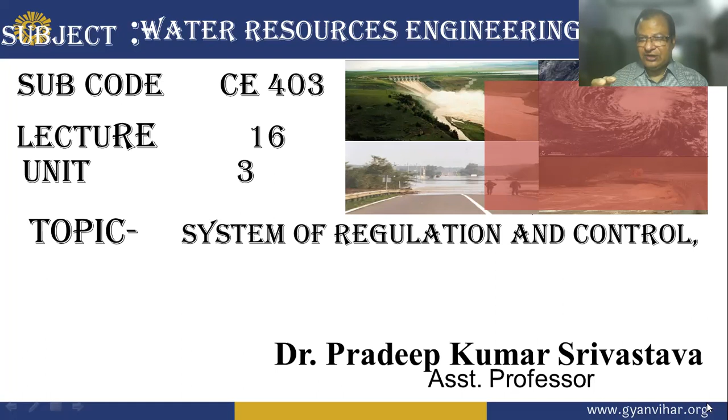Today's topic is the system of regulation and control. Dear boy, when you are constructing and maintaining a project, first you construct a dam, a barrage, or any structure. So how do you regulate them? Today's topic depends entirely on this matter: the system of regulation and control.

Now, in the project, hydroinformatic tools oriented to water volume, conservation, and control in open channel are going to be developed. They will be based on innovation by means of dynamic and non-linear algorithms.

The correct and optimal performance of the control structure in channel is an open problem after decades of research and development. A robust and efficient control methodology will be developed to form the base of control elements which allow a fast and trustworthy control of the characteristics of flow.

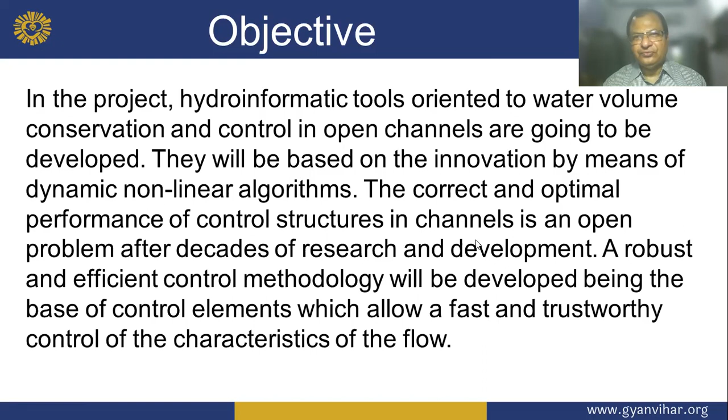Channel management is more and more based on the implementation of control elements that allow reducing the workforce necessary for regulation and increasing service quality, with the fundamental aim of developing a computational tool managed for objective-oriented control of gates.

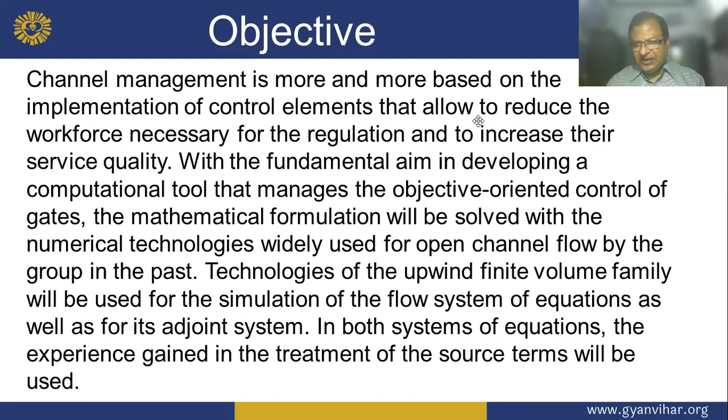The mathematical formulation will be solved with numerical technology widely used for open channel flow by the group, using upwind finite volume technology for the simulation of the flow system of equations as well as the adjoint system. In both systems of equations, the experience gained in the treatment of the source term will be used.

In case of a direct irrigation scheme, a weir or barrage is constructed across the river and water is headed up to the upstream side. This arrangement is known as headwork. Let me explain, think of it like this.

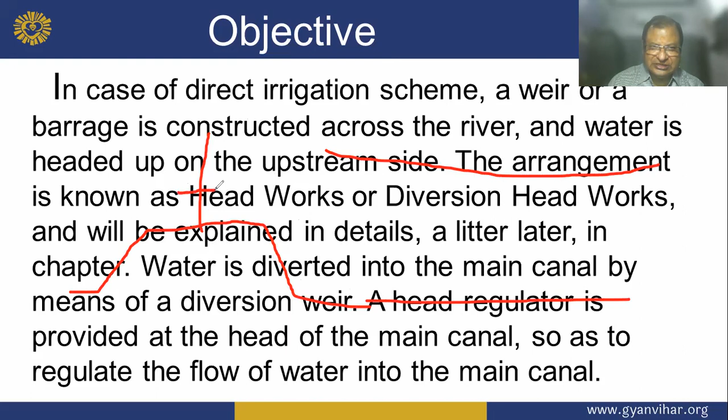Suppose, dear boy, this is the head regulator, it is the gate, and this is the canal. So if the gate is opened up to this point, the head of the canal will be this. If the gate is opened up to this point, the head is this. If the gate is opened up to a total of 4 meters, the head will be this. Clear? How does the head govern? Clear?

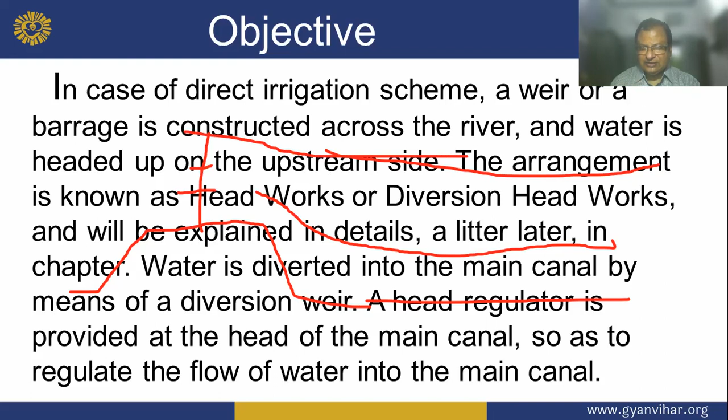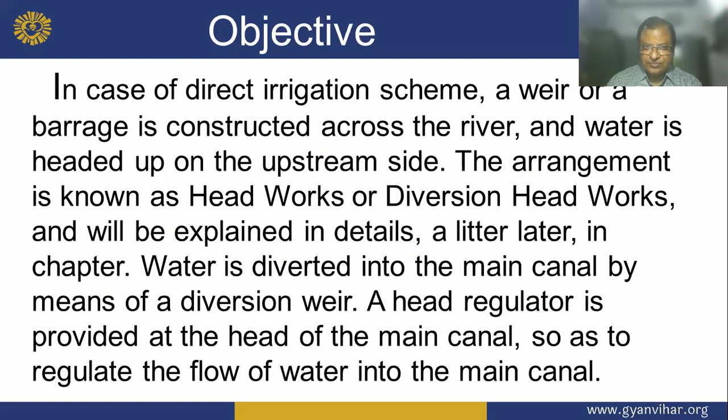In a storage irrigation scheme, a dam is constructed across the river, thus forming a reservoir on the upstream side. The water from this reservoir is taken into the main canal through the outlet sluice.

There are generally two main canals which offtake from the reservoir, called left bank and right bank. We will see in the diagram what is the offtake, and what is the right bank and left bank.

So dear boy, suppose this is the canal and this is the headwork. If a canal is passing like this, this side is the left bank canal, and this is the right bank canal. Clear? It is clear.

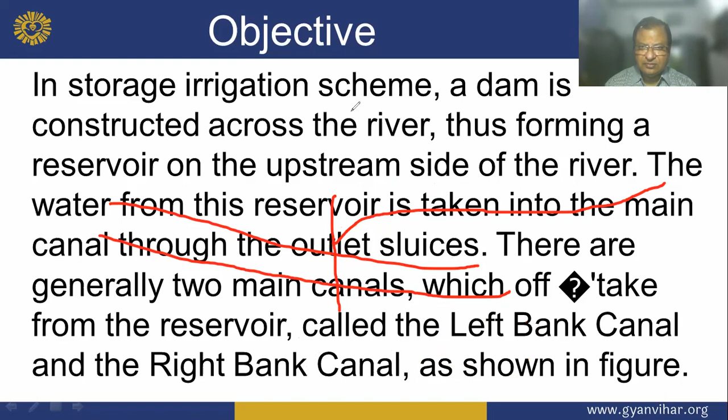In certain storage irrigation schemes, the commanded irrigation area may be far away from the dam site. In such a case, a separate headwork consisting of a pickup weir is constructed across the river on the downstream side of the main dam. Why, my dear boy? If your dam is constructed on the river here...

This is a very big hillock, a good site to store the water, and the irrigation command area is around 50-60 kilometers away. So after the 50-60 kilometers, you will construct a barrage, and this is the headwork of the barrage. Clear?

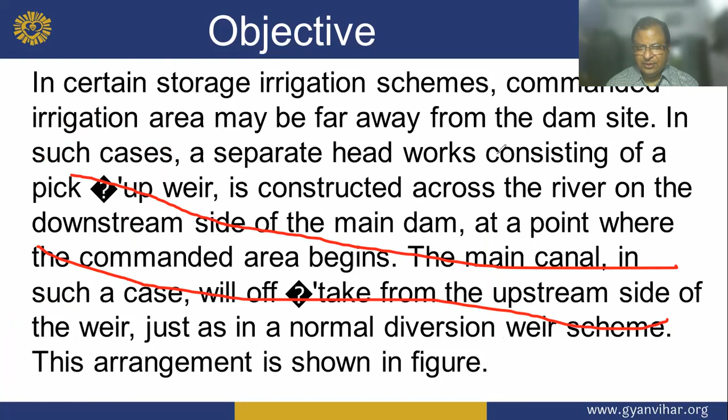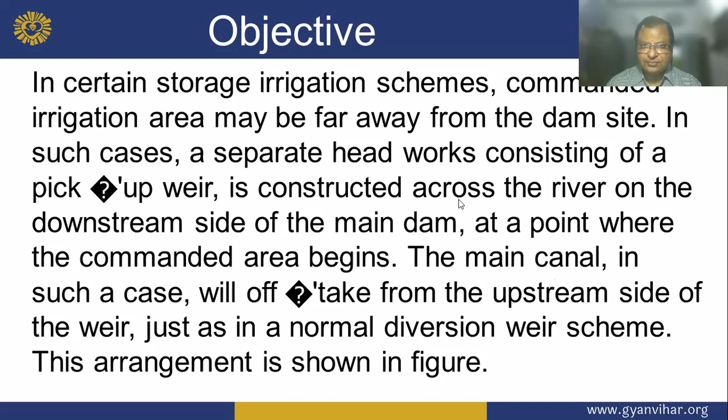The main canal, in such a case, will offtake on the upstream side of the weir, just as in a normal diversion weir scheme. This arrangement is called another offtake point. In both these irrigation schemes, once the water reaches the main canal, the problem left is to distribute this water into the field.

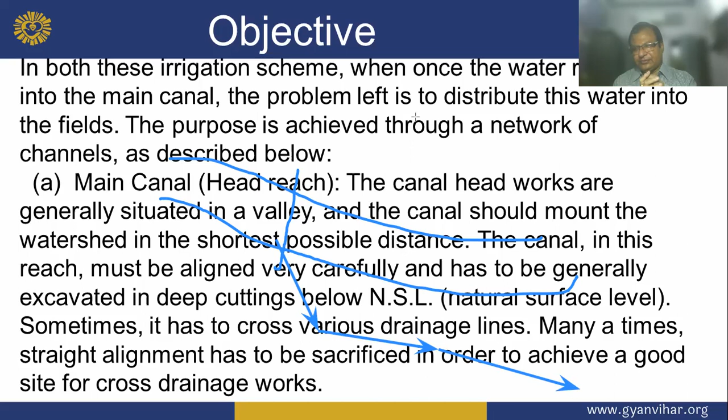If this is the river, if this is the barrage, and the main canal is rising here, now the problem starts: how will water be delivered? How do you supply the water? So it had to be distributed.

The purpose was achieved through a network of channels as described below. The main canal, at the head reach, the canal headworks are generally situated in a valley, and the canal should mount the watershed in the shortest possible distance. The canal in this reach must be aligned very carefully and has to be generally excavated in deep cutting below the natural surface level, which is called N.S.L..

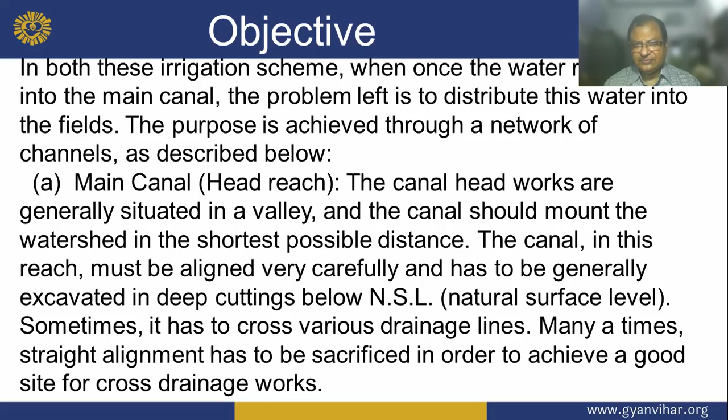Sometimes it has to cross various drainage lines, so many a time a straight line alignment has to be sacrificed in order to achieve a good site for cross drainage work. Now, distributaries: a smaller channel which takes off from the branch canal and distributes their supply through outlets into the minor or water course is called a distributary.

They are aligned either as a watershed channel or as a side slope channel. The discharge in a distributary is generally less than 30 cubic meters per second. Sometimes, depending on the country, this differs.

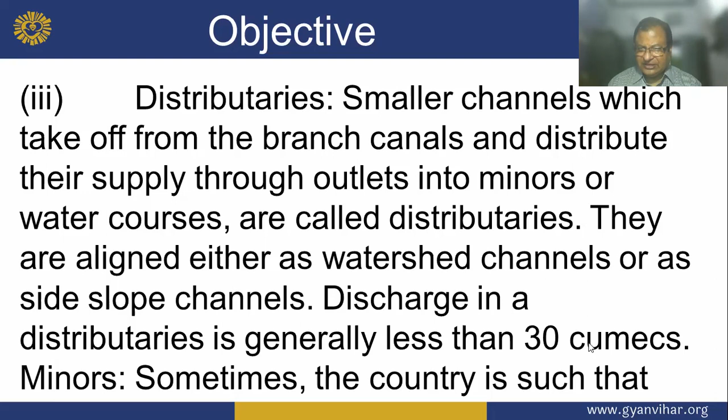For the main canal portion below the head reach, an attempt is made to align the canal along the watershed and somewhat central to the commanded area. Sometimes the watershed has to be sacrificed to bypass towns, and the main canal is not required to do any irrigation directly. Clear? Keep this in mind: the main canal is not required to do any irrigation.

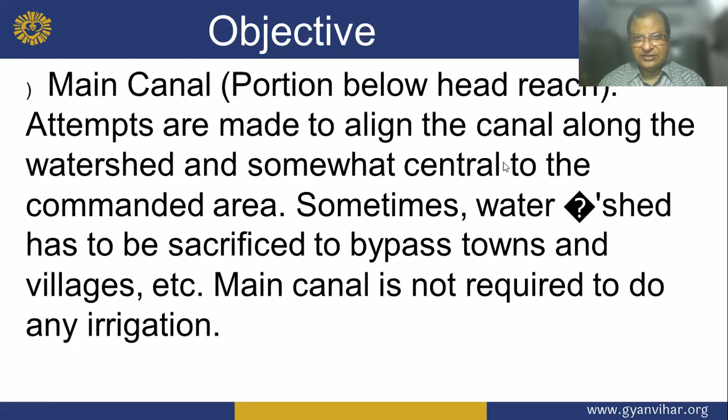Branch canal: when a main canal leaves the high ground, it must therefore bifurcate into branches, covering the whole tract required to be irrigated. The canal in such portions are called branch canals. So very little irrigation is done from the branch canal.

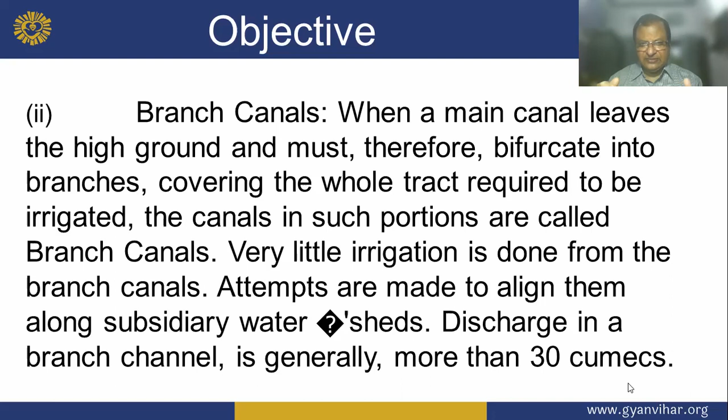Attempts are made to align them along a subsidiary watershed. The discharge in a branch canal is generally more than 30 cubic meters per second.

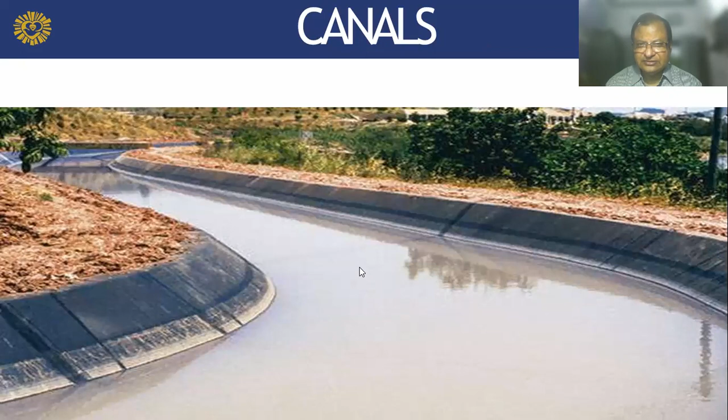Now, a canal is defined as an artificial channel constructed on the ground to carry water from a river, or another canal, or a reservoir, to the field. So what is the classification of canal?

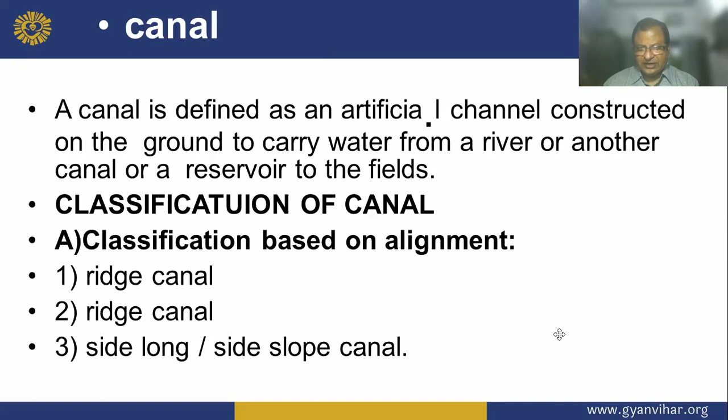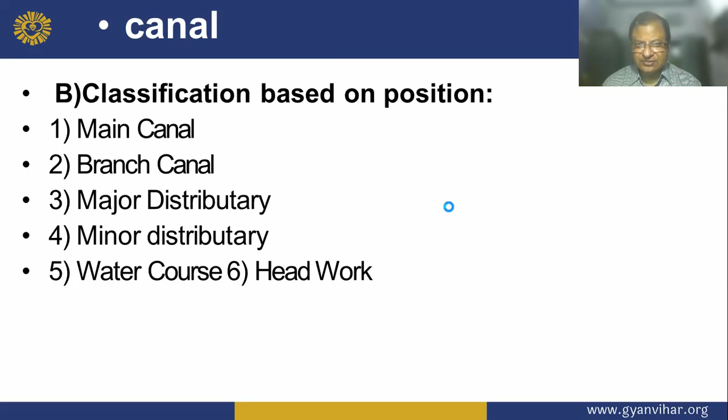If you are taking the classification based on alignment: ridge canal, side ridge canal, and side slope canal. And classification based on position: main canal, branch canal, major distributary, minor distributary, water course, and headwork. So we will discuss the contour canal next.

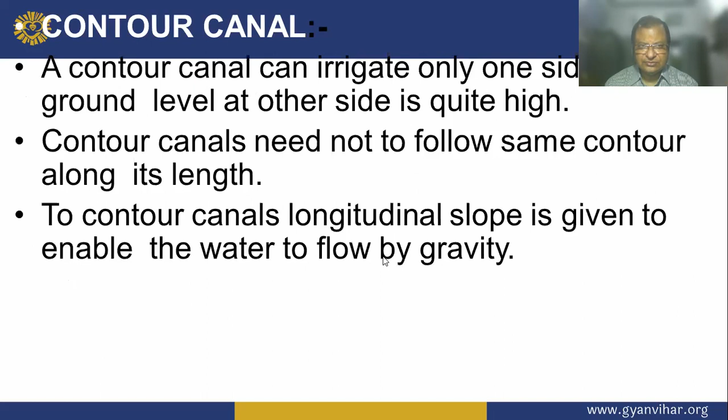Contour canal, you have read in my previous class. This is the side slope canal. It is very important. Dear boy, when your canal is running, this is a very important thing, and I want all of you to please listen carefully. This is your canal.

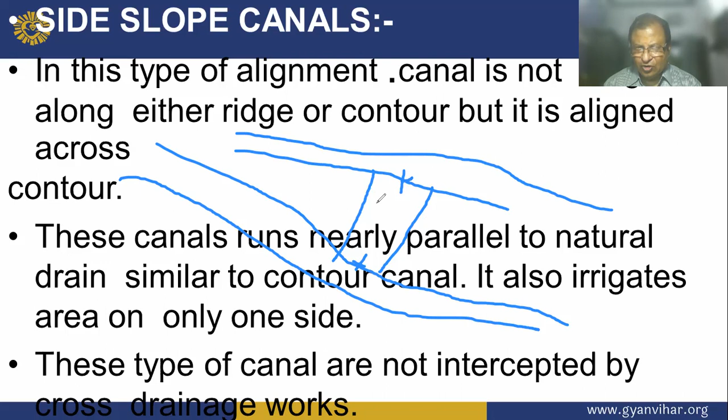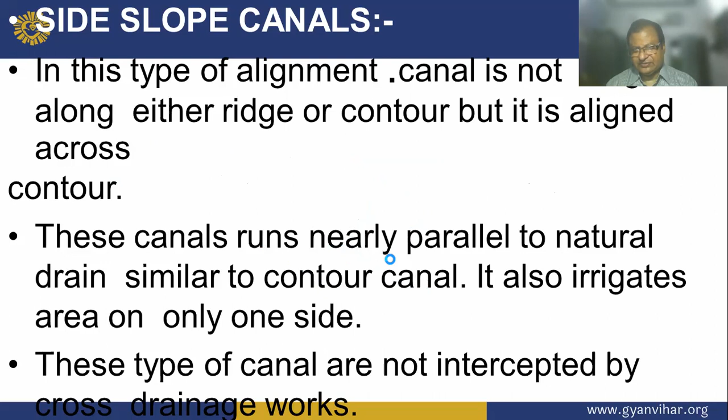These types of canals are not intercepted by the cross drainage works. So this is the difference between contour canal and ridge canal. In the contour canal, it follows the falling contour. In the ridge canal, it follows the higher predominant ridge within the command area.

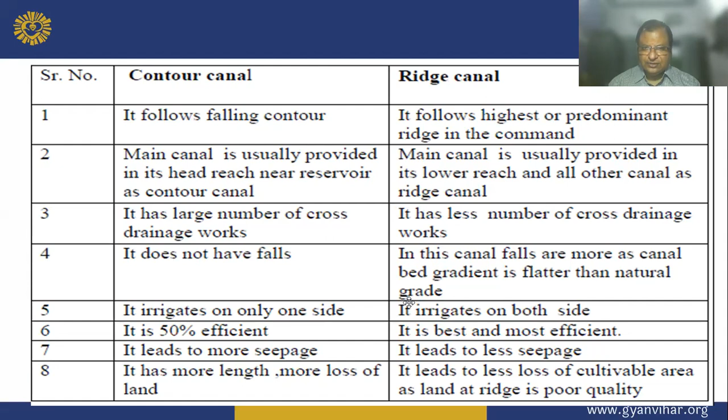Now we will discuss the head regulator. When canal branches are taking off from the reservoir, main canal, and distribution system, a head regulator is provided at the head of the canal to divert the necessary discharge from the reservoir to the canal or main canal to branch canal, to control and measure the discharge, to control silt entry at the canal's take-off, to stop the supply of water when not required, and at the end of the rotation or for repair of the downstream canal.

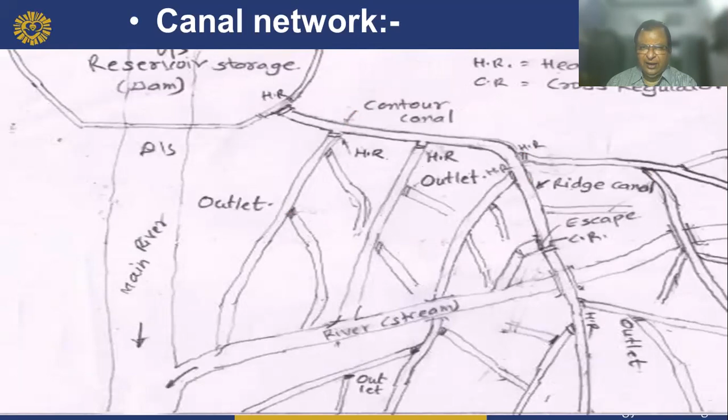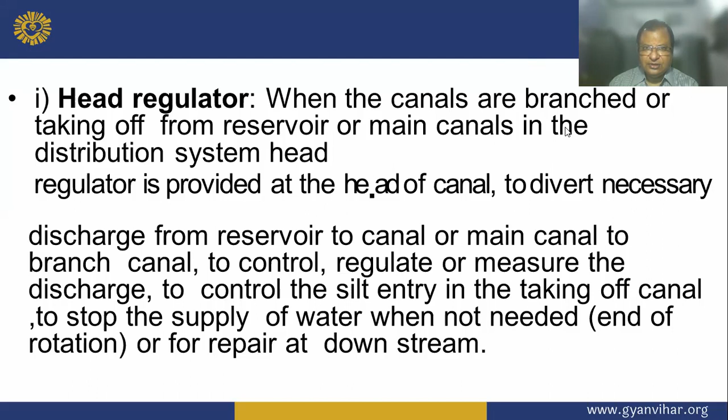Now you have seen what is the head regulator. Now we will discuss the cross regulator. Dear boy, when it is required to raise the water level in the main canal in order to regulate the flow in the branch canal, to stop the flow in case of repair downstream, or to divert silty overflow water near the river or stream during flood control, a cross regulator is provided.

Suppose this is the canal, you have provided a barrier. Now this is the cross regulator. When you want to turn your water into the canal, what will you do? You will provide a barrier. This is called the cross regulator, and water is coming from this side, from this side.

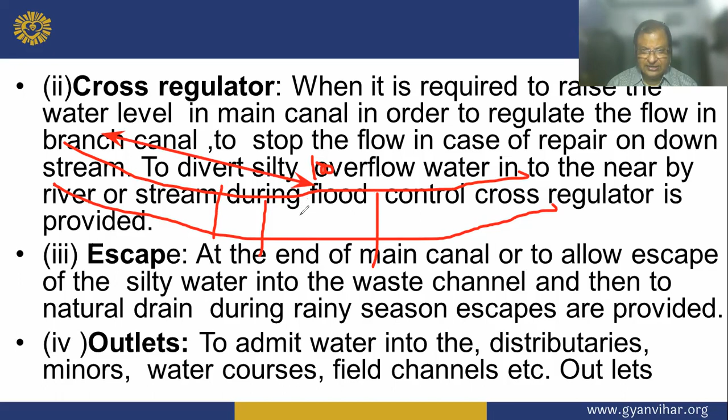Now, escape. What is an escape, my dear boy? Suppose this is a canal, and after 100 kilometers, suppose the canal has a breach, all the water is spreading at its former speed. So what will we do? We will make an escape channel, and after that there will be a cross regulator. The water will rise. Here you will provide an escape and you will provide a gate. Water will rise and go through the nala, and this is the nala. This is called escape.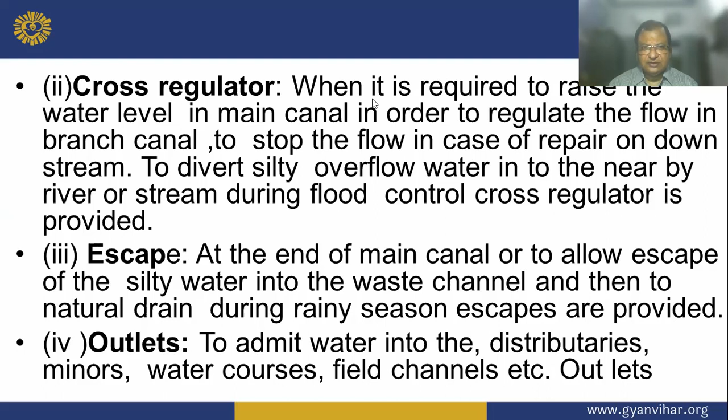Now this is the outlet. It is used to admit water into the distributary, minor, water course and field channel, etc. The outlet is the position connecting the main canal, branch canal, and distributary.

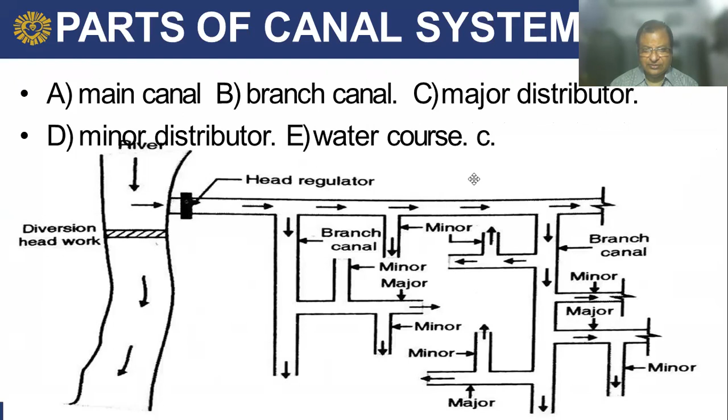Again, the canal from the reservoir, which is the source, is called the main canal. Its function is to carry the total water and distribute it to the canal system. It is the largest canal system, and no direct irrigation is normally done from the main canal.

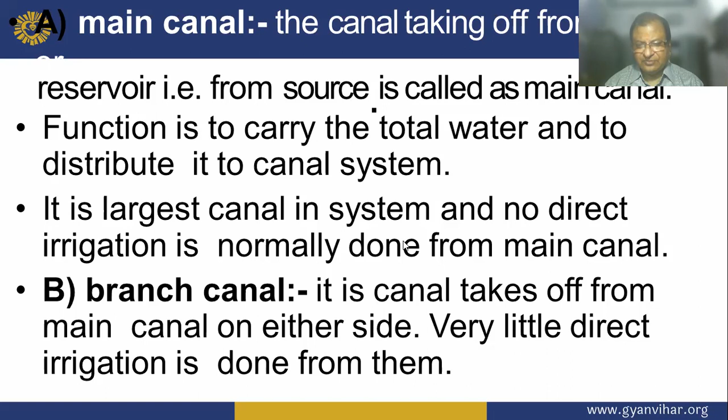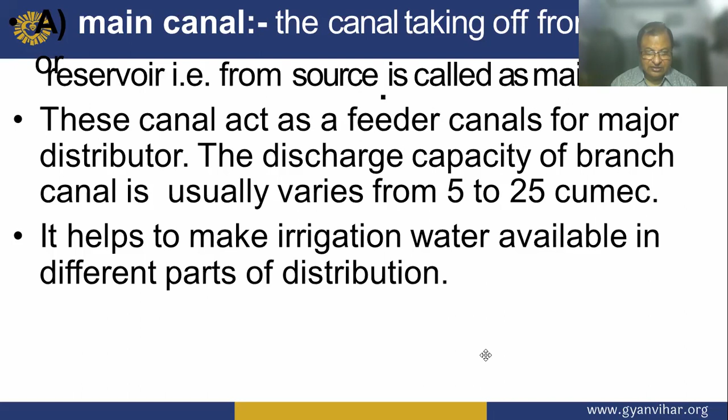So what is a branch canal? It is a canal that takes off from the main canal, and on either side very little direct irrigation is done from them. This canal acts as a feeder canal for major distributors. The discharge capacity of the branch canal usually varies from 5 to 25 cumecs. So it helps make irrigation water available in different parts of the distribution.

Now, the main canal supplies water to other distributors. The discharge capacity of a major distributor varies from 0.25 to 5 cubic meters per second, and in some cases it may be up to 10 cubic. These are generally used for direct irrigation, and their main function is to distribute water to the water courses.

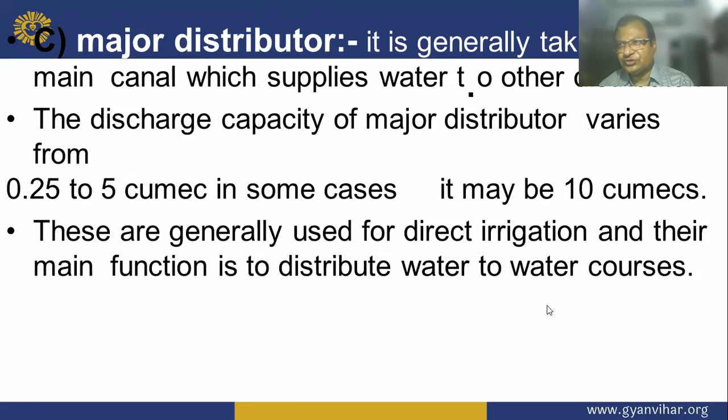Now, the minor canal which supplies water to the outlet distribution generally takes off from the major distributor. This is another distributor and supplies water to the water course. Its discharge capacity is less than 0.25 cubic, and these are also used for direct irrigation.

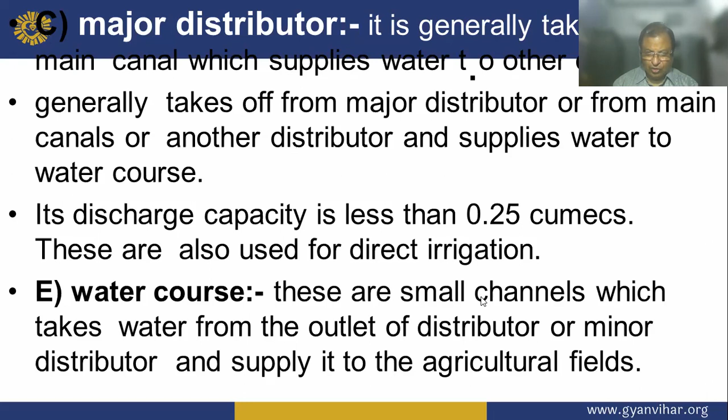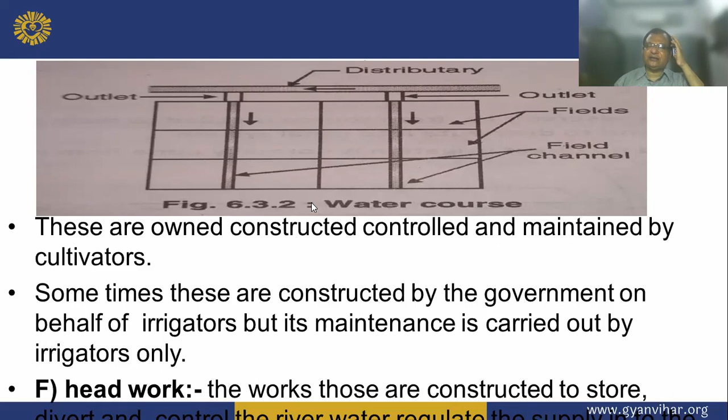Now, water courses are small channels which take water from the outlet of the distributor or minor distributor and supply it to the agricultural field. These are owned, constructed, controlled, and maintained by the cultivator. Sometimes these are constructed by the government on behalf of irrigators, but the maintenance is carried out by the irrigators only. Why? Because the government has constructed the network, but every time, who is using it? The farmer. So they will maintain it.

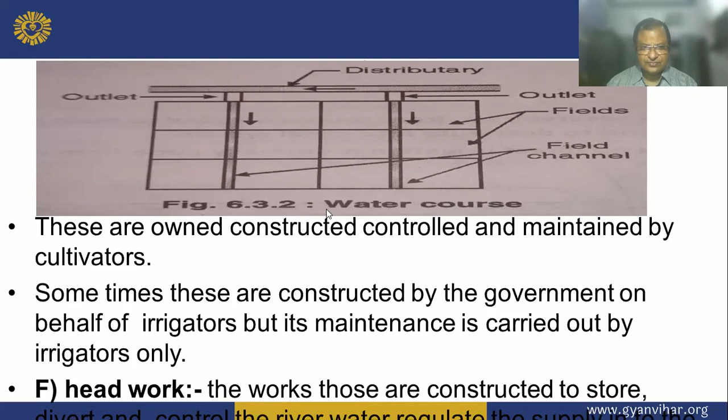Now, head works. These are works constructed to store water.

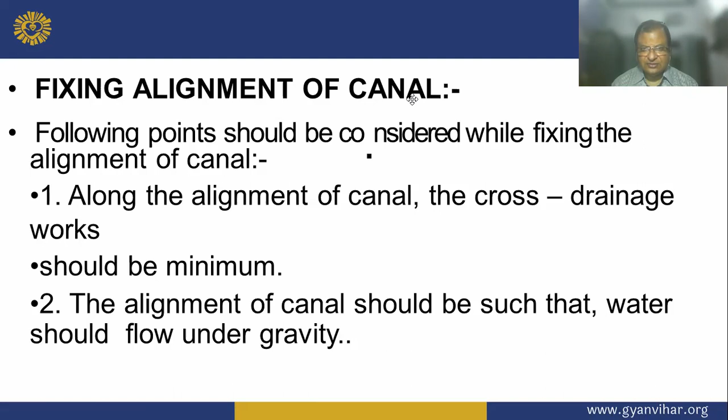Now, fixing of the alignment of the canal. The following points should be considered while fixing the alignment of a canal: along the alignment of the canal, there should be minimal cross drainage work. The alignment of the canal should be such that the water flows under gravity. The canal alignment should be such that the quantity of earthwork in cutting should be equal to the quantity of earthwork in filling. The alignment should be such that it can cover the maximum command area. The length of the main canal should be minimum, the number of curves should be minimum, and the alignment should not be made in rocky or cracked strata.

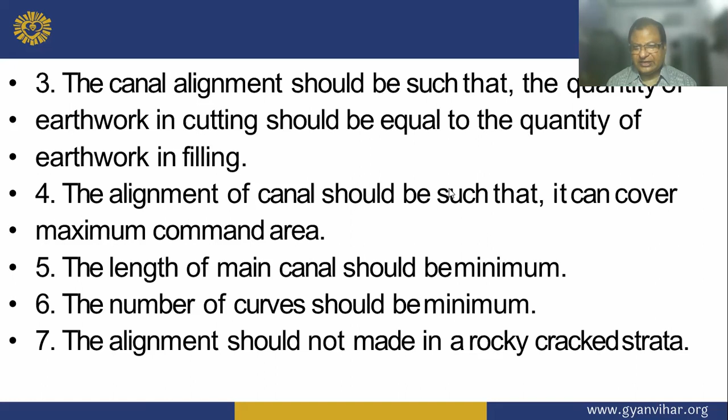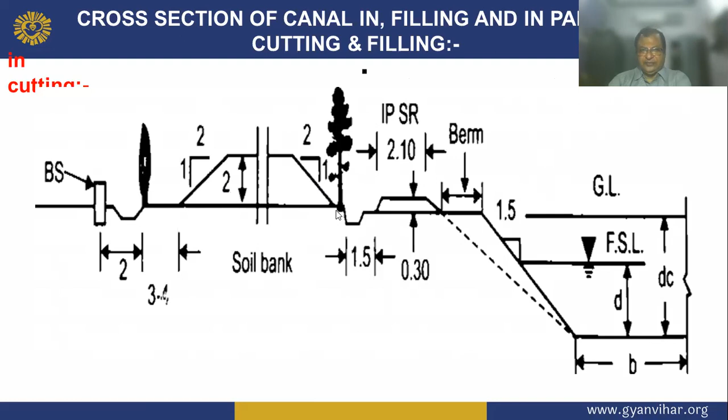So this is the cross section of the canal. This is the road nali, this is the road, this is the road nali again, and this is the canal embankment.

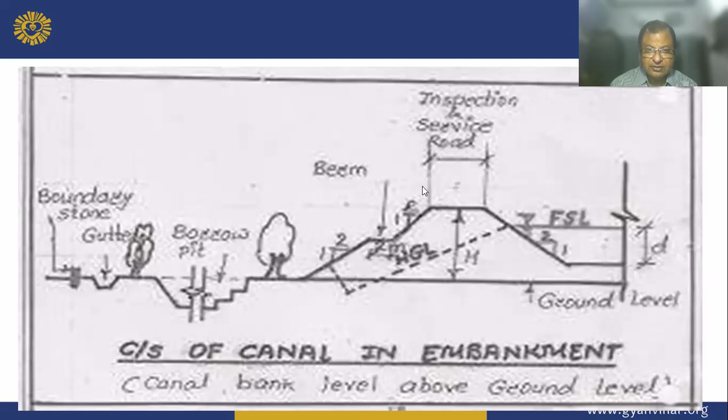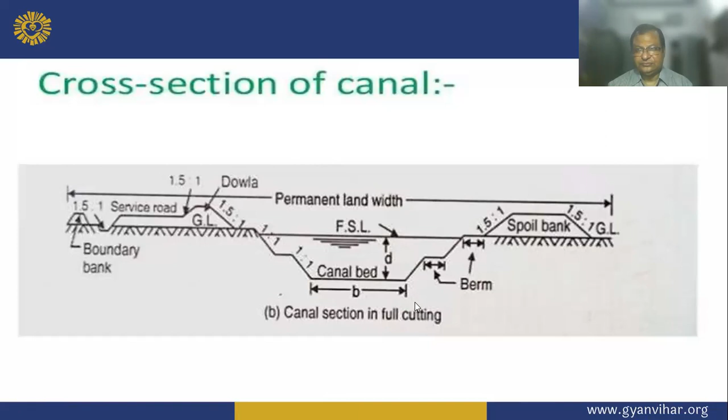This is the cross section of the canal. This is the cross section of partial cutting and partial filling. My dear boy, in total there are three canal sections: first, partial cutting and partial filling; second, full cutting; and third, full filling. The best canal cross section is partial cutting and partial filling.

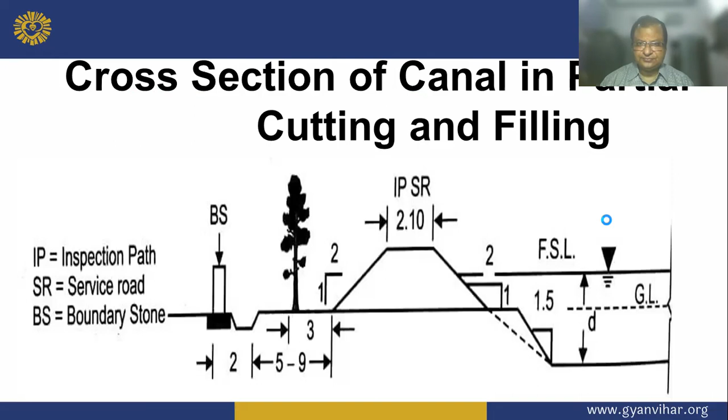Now the question covers canal lining. In my previous class, I explained that if 1 kilometer of non-lined, unlined canal is made for 1 lakh, then a lined canal will be made for 2 lakh.

This means providing an impervious layer of 2.5 to 15 centimeter thickness to protect the bed and inside of the canal, generally made of RCC, bricks and stone, etc. So these are the materials used in canal lining.

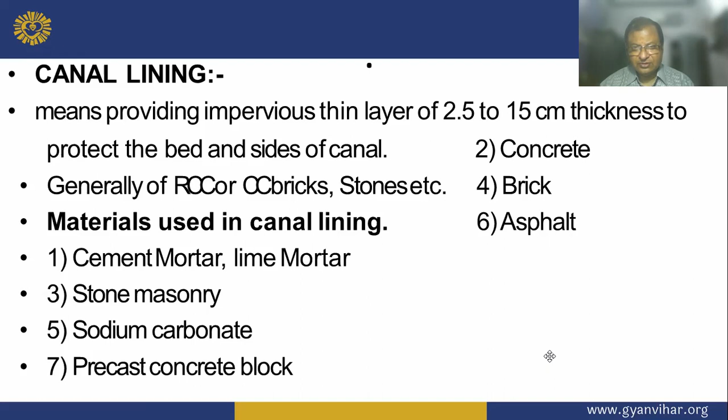Now we will discuss types of lining. First, cement concrete lining. Concrete is a lining material that gives excellent hydraulic properties, and the thickness of the lining is determined by the requirement of imperviousness and structural strength.

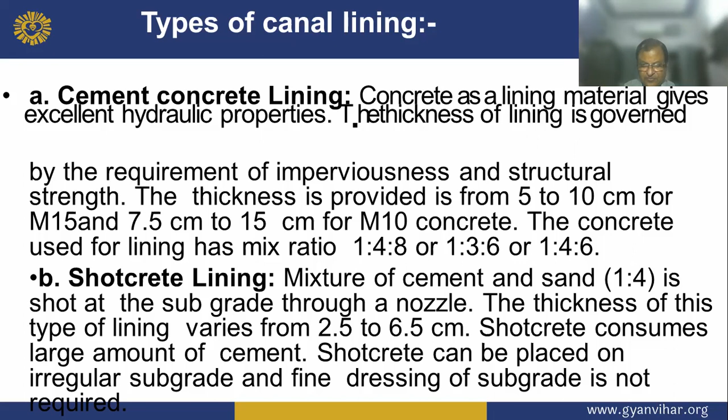So to create shotcrete lining, a mixture of cement and sand in ratio 1:4 is applied to the subgrade through a nozzle, and the thickness of this type of lining varies from 2.5 to 6.5 centimeter, and a large amount of cement is consumed. Large amounts of cement shotcrete can be placed on irregular subgrade, and fine dressing of the subgrade is not required.

This type presents precast concrete lining. This type of concrete lining consists of precast cement concrete slabs, usually 90 centimeter by 30 centimeter in size. The thickness of each slab is from 5 to 6.5 centimeter. The blocks are manufactured with an interlocking arrangement. The slabs are laid on a well-prepared and compacted subgrade.

Cement mortar lining: the thickness for this type of lining is kept from 1 to 4 centimeter. A large amount of cement is consumed in this type of lining, and it is very costly.

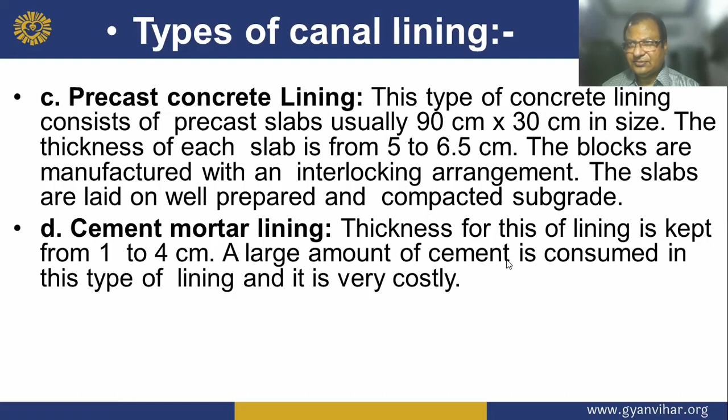Now cement concrete lining. Concrete as a lining material gives excellent hydraulic properties, and the thickness of lining is governed accordingly.

Precast concrete lining consists of precast slabs, usually 90 centimeter by 30 centimeter in size. The thickness of each slab is from 5 to 6.5 centimeter. The blocks are manufactured with an interlocking arrangement and laid on a well prepared, compacted subgrade. The cement mortar thickness for the lining is kept from 1 to 4 centimeter. A large amount of cement is consumed in this type of lining, making it very costly.

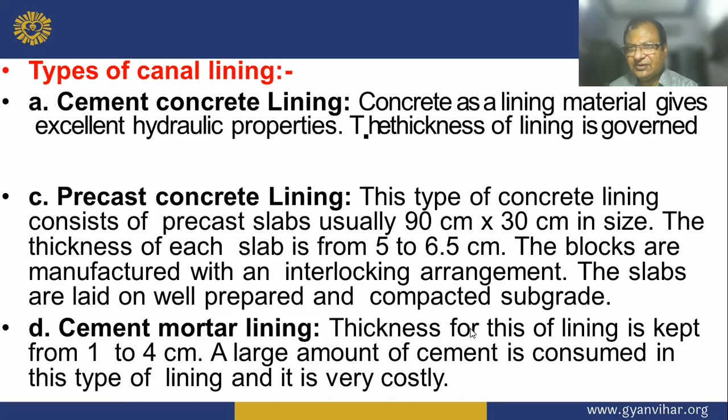Now the important brick lining, which is cheaper than cement lining. This type of lining consists of a single or double layer of brick masonry followed by a layer of tiles laid in mortar. The first layer is laid on a 12 mm layer of 1:6 cement mortar. A 12 mm thick plaster layer in 1:3 cement mortar is laid over the first layer, and then the second layer is laid over the 1:3 cement mortar.

Asphalt lining is a controlled mixture of asphalt and graded aggregate, mixed at high temperature of 200 degrees centigrade. It is covered with a 30 centimeter layer of earth material for protection. The material is placed either by hand or by equipment similar to concrete.

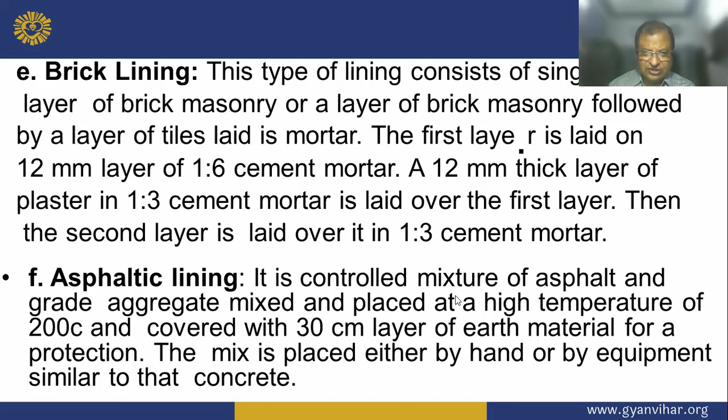Now clay puddle lining. Clay puddle is produced from clay first exposed to weathering, then mixed with water to bring it to saturation and pugged thoroughly by trampling under man's or cattle's feet. The thickness of lining is 30 centimeter and it is then protected by a layer of earth material.

Sodium carbonate lining: the mixture consists of clay soil 10% and sodium carbonate 6%. The thickness of lining is kept at 10 centimeter. This type of lining is used for small canals and watercourses.

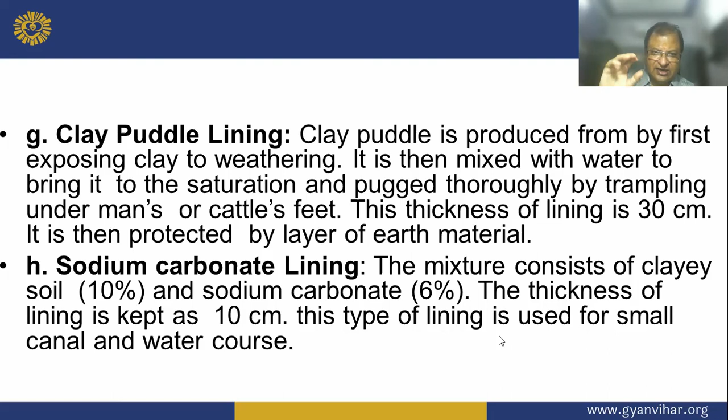Now stone block lining. This consists of undressed stone blocks set in mortar laid on a prepared subgrade. This lining is effective in checking seepage but has considerable resistance to the flow of water.

Now prefabricated lightweight membrane lining. These are made of matted fibers of asbestos or jute, and are coated with asphalt. It is laid on a smooth, prepared subgrade and covered with a layer of earth material.

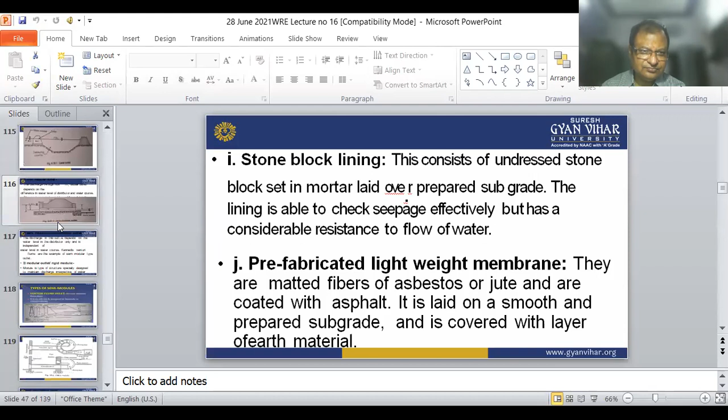Now, a rain gauge should preferably be fixed where? Give me the answer. A rain gauge should be fixed in the open space. Answer is C.

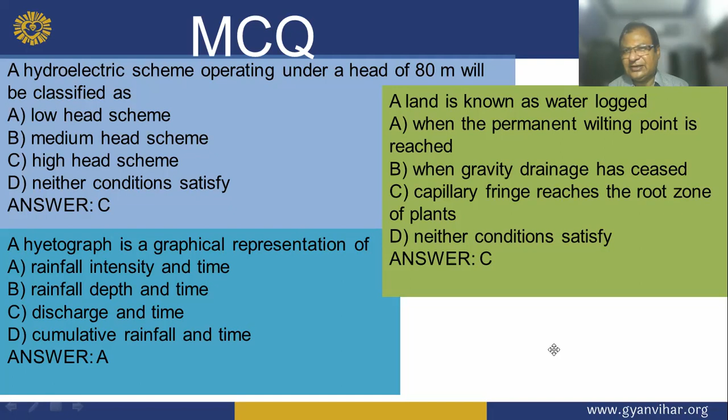Now, a hyetograph is a graphical representation of what? Correct answer is rainfall intensity and time. Answer A.